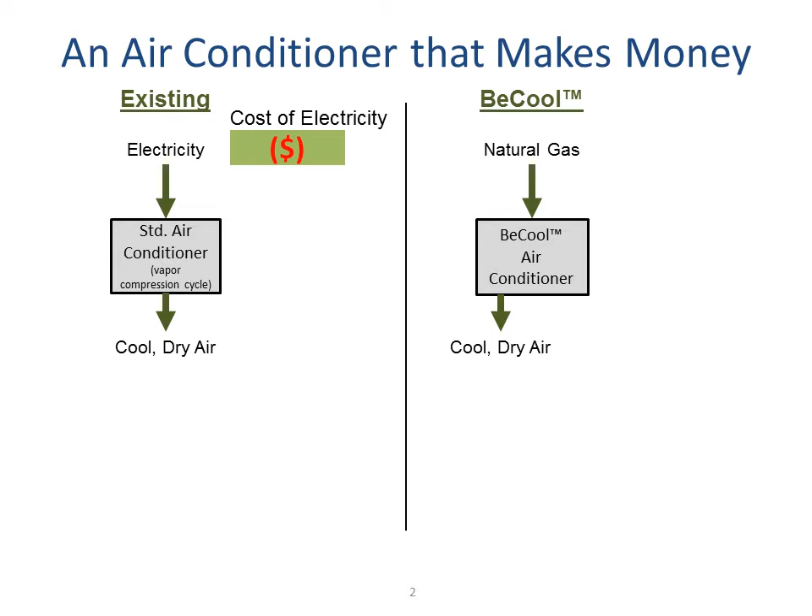Today, a standard air conditioner uses electricity to produce cool, dry air. The operating cost of the system is the cost of the electricity consumed. BePower is developing the BeCool air conditioner. This air conditioner uses natural gas instead of electricity. Like a standard air conditioner, it also produces cool, dry air. However, electricity is also produced as a byproduct of the air conditioning process.

In the BeCool air conditioner, the user pays for natural gas. However, the electricity produced can be used to power the rest of the building. This has an economic value because it reduces the cost of the electricity for the entire building. As you can see, the value of the electricity is in most cases higher than the cost of natural gas. The result is an air conditioner that makes money as it operates.

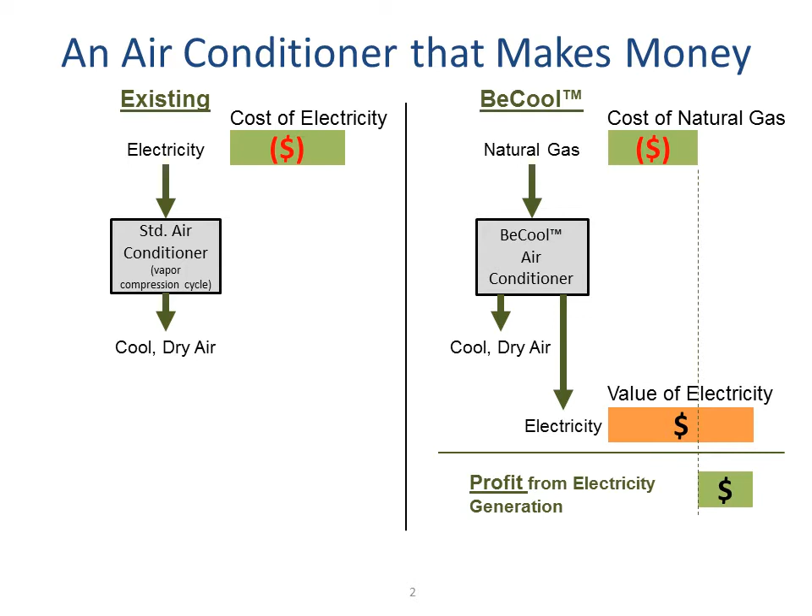The competitive advantage of the BeCool product is significant. To illustrate this, a comparison of costs associated with existing high-efficiency rooftop air conditioners, dedicated outside air systems or DOAS, and projected costs for a similar BeCool system are shown in the table. This analysis assumes all these units have similar specifications. They provide 2,500 CFM of air to the building and 10 tons of cooling.

The BeCool system also produces 15 kilowatts of electricity and consumes natural gas at a rate of 43 kilowatts thermal based on its lower heating value. The result shows significant life cycle cost savings ranging from 25% to 65% depending on how the system is used.

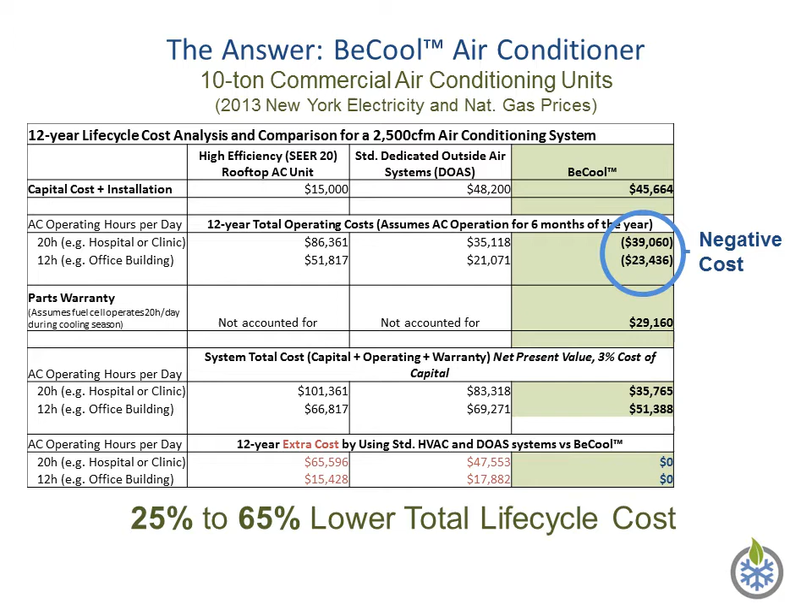Note that the operating cost of the system in New York is a negative number. This is not an error. As the system operates, it generates electricity at a lower cost than the electricity supplied by the grid. While the electricity price in New York is 15 cents per kilowatt hour, the BeCool system generates it at 8 cents per kilowatt hour, almost half the cost.

Increased energy efficiency, together with lower fuel costs due to the use of natural gas, enable the BeCool system to make money while operating. As shown in this slide, in energy terms, natural gas is significantly less expensive than electricity. Moreover, the tendency is for this disparity to increase in time.

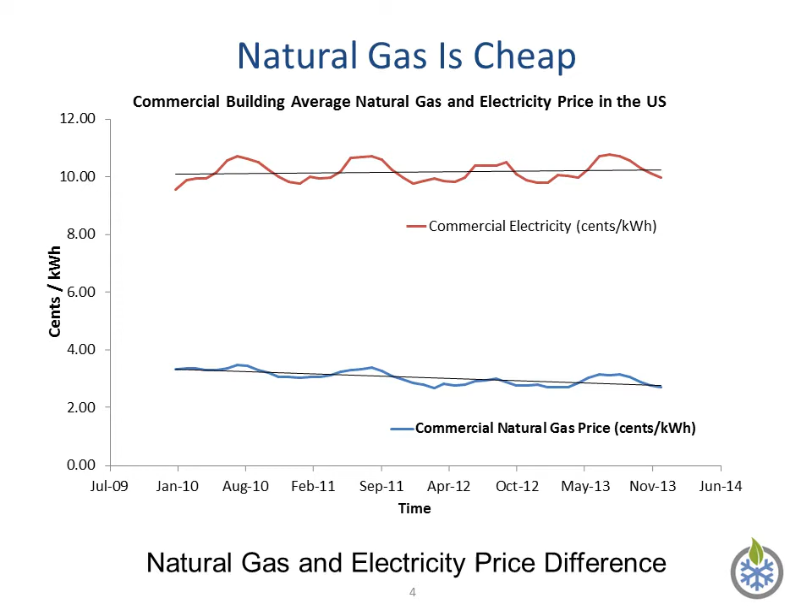The BeCool system is more than an air conditioner because it provides solutions to some of our most important global problems. Global climate change and a warming planet drive demand for air conditioning. It also drives demand for energy efficiency and for products that reduce greenhouse gas emissions, such as the BeCool air conditioner.

Regulations for reduced greenhouse gas emissions and air pollution controls tend to increase electricity prices. Increased prices drive demand for higher efficiency and for products that do not use electricity, such as the BeCool air conditioner. In places where electricity prices are capped or regulated, the reliability and quality of the electrical service often suffers. This drives people to seek alternative ways of ensuring operation of critical systems. In the commercial sector, air conditioning is a critical system. By using natural gas, the BeCool air conditioner is not dependent on grid stability.

Natural gas and LPG are an increasingly important alternative to petroleum and coal due to their lower greenhouse gas emissions. While demand for natural gas and LPG is increasing, their price in energy terms is expected to remain below that of electricity.

The World Health Organization considers air pollution the world's largest single environmental health risk. It is estimated that 7 million people die annually due to air pollution. The EPA estimates that this number is 200,000 people in the US alone. The two principal sources of air pollution are the transportation and electricity production industries.

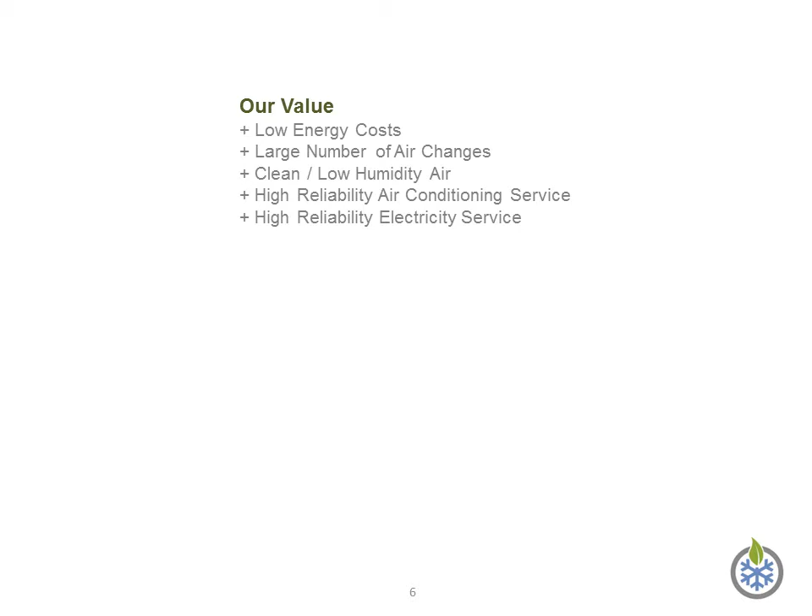Since the air conditioner is not dependent on the electric grid, it reduces the probability of a complete loss of air conditioning to the building. Since we produce electricity, we increase the reliability of the electric service. Who needs this? Data centers, hospitals, office buildings, shopping centers, to name a few.

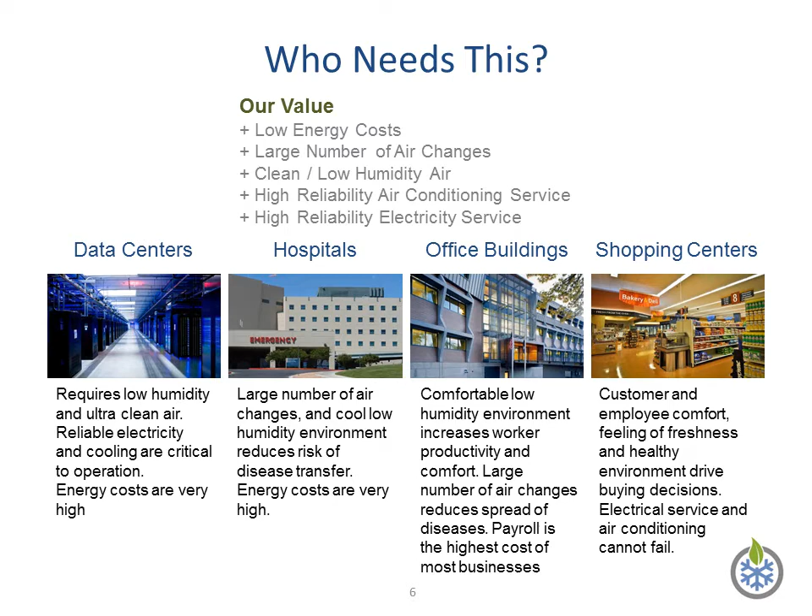The air conditioning market is mature, large, and growing. Revenues for the industry in the U.S. were estimated to be $74 billion in 2013 by IBISWorld. This represented a 4.1% year-on-year growth. Increasing electricity prices and increased use of central air conditioning systems is driving growth for high-efficiency air conditioners.

Navigant Research estimated that the present market is $17.2 billion with an expectation for high growth in the next 8 years. The market is projected to be $33.2 billion in 2020. The global market for air conditioning is expected to reach $107 billion by 2016. This represents a 6.1% year-on-year growth in revenues.

There is a strong appetite for products that save energy and reduce environmental impact. In fact, the market for energy-efficient products is booming. However, the most successful products are completely transparent to the user. They do not require changes in behavior or infrastructure.

The International Energy Agency estimated that in 2011, the energy efficiency market saved $420 billion worth of oil for its member countries. The International Energy Agency calls this the hidden fuel and mentions that the products that produce the highest degree of energy savings are hiding in plain sight. For the consumer, these products are effortless.

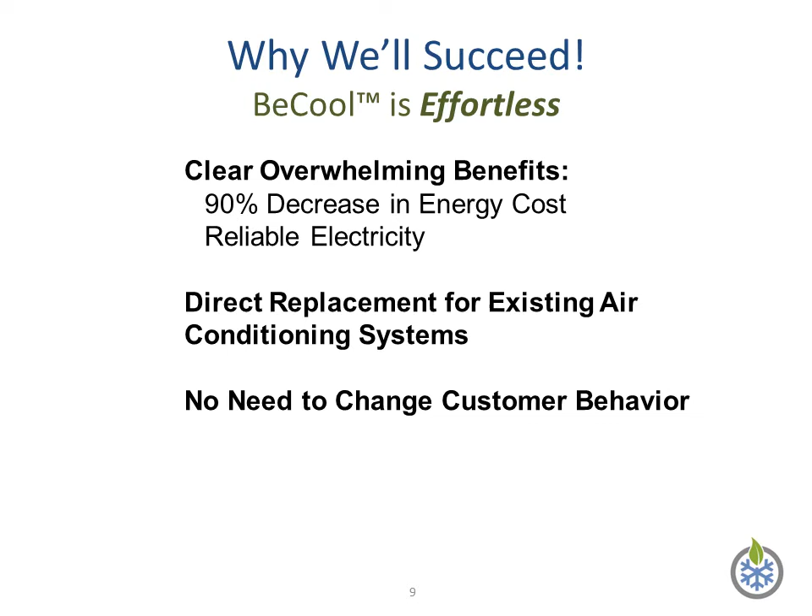The system works in the following manner. A liquid desiccant flows between two system components, a dehumidifier and a regenerator. A liquid desiccant is a fluid that readily absorbs water. Hot humid air that we want to cool enters the dehumidifier. Within the dehumidifier, the air comes in contact with the liquid desiccant. In doing so, the moisture in the air is absorbed by the desiccant.

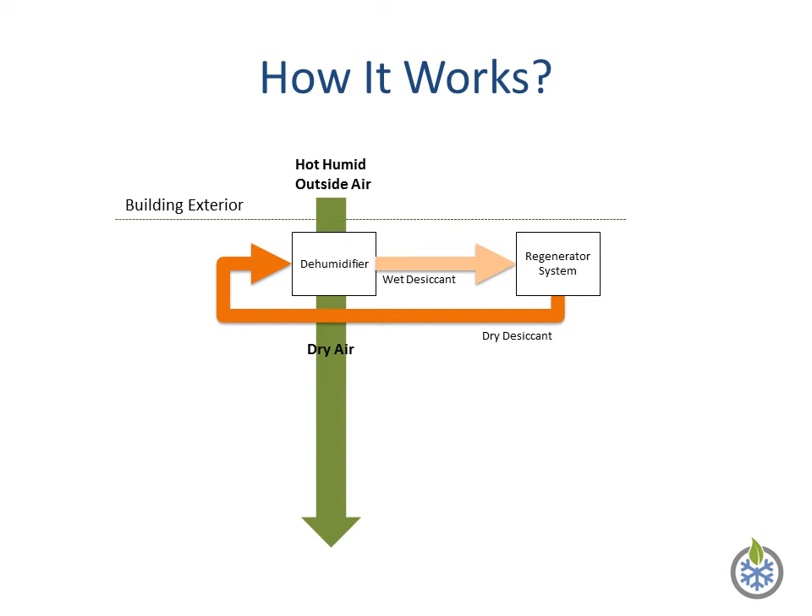This process tends to raise the temperature of the air, so the air is maintained at a constant temperature by flowing a separate airstream through the dehumidifier. This separate airstream cools down the dehumidification process. The source of this airstream could be building exhaust air.

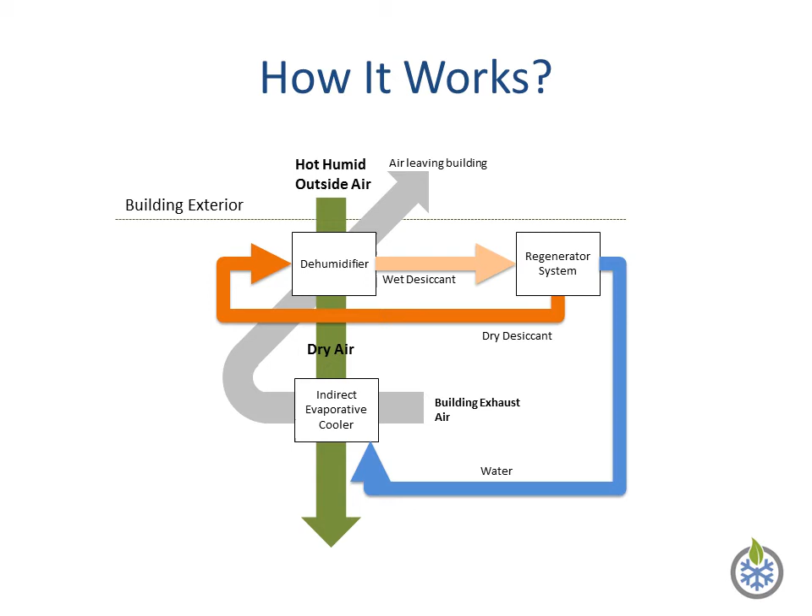The temperature of the air is dropped using an indirect evaporative cooler. In this component, water is introduced into the building exhaust airstream. This process drops the temperature of this airstream. We use this low temperature airstream to drop the temperature of the dry air produced in the dehumidifier. The result is cool, low humidity air that can enter a building.

The regenerator is an electrochemical device that consumes natural gas and produces heat, water, and electricity. The heat produced by the regenerator is used to recover the water in the liquid desiccant. This water, coupled with the water produced in the regenerator, is used to drive the indirect evaporative cooler. The electricity produced is a byproduct of the regeneration process.

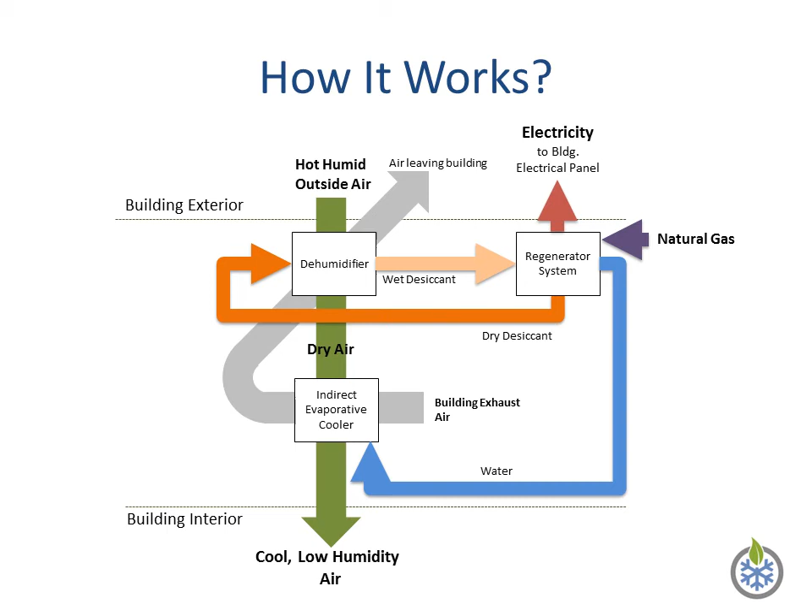The BeCool air conditioner system is in the development stage. We have conducted detailed engineering analysis and design, and patents have been filed. We are presently prototyping and testing key components of the system. We expect time to market will take 3 years. This will include prototyping, testing, design for manufacturing, pilot fabrication, field trial release, and product launch.

We deem the technology risk for the product to be low. The vast majority of the system components are off-the-shelf items and have been demonstrated to work under the conditions specified by the BeCool system.

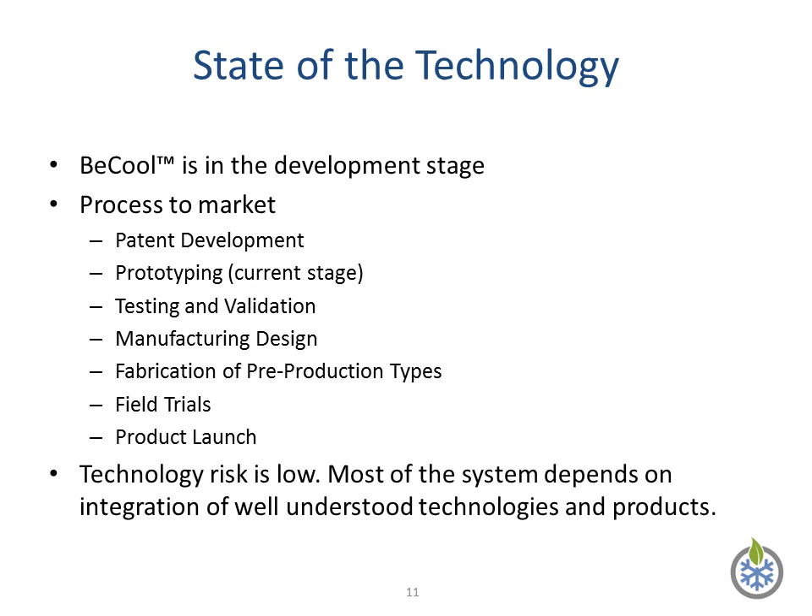Our business model is based on licensing, product support, and product development. BePowerTech will work with the manufacturer who pays a license fee to BePowerTech for the use of its patents and its product design. The company will also derive revenues from product development based on customer requirements. This manufacturer can be an air conditioning OEM or an outsourced manufacturer. The manufacturer will engage suppliers, will provide product warranty, and will supply products in a global market. The manufacturer will work with distributors who will engage customers directly.

The leadership of BePowerTech is formed by myself and John Kaufman. I have 18 years of experience in the energy efficiency, energy technology, and air conditioning business. This experience has spanned R&D, product development, and corporate management. I have a PhD in mechanical engineering with concentration in thermal sciences.

John Kaufman is my co-founder and friend. He brings to the company over 40 years of management experience in corporate management in the energy technology and software field. John was the co-founder of International Batteries and of Iconics. This corporate structure brings together experience and technical expertise and the capacity to reach the company's goals.

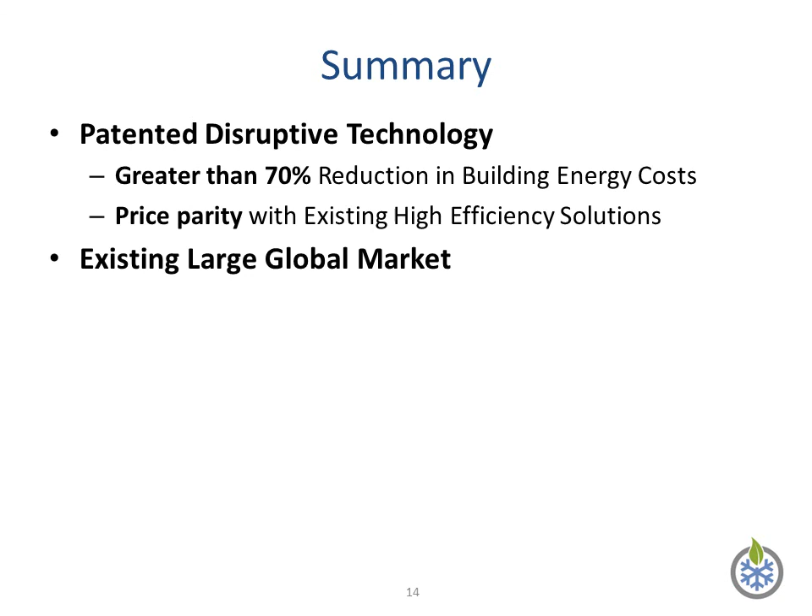In summary, our company is developing patented, disruptive air conditioning technology. This technology enables us to produce products that provide our customers with overwhelming benefits over existing solutions. The air conditioning market is an existing large market. We expect product release into this market in the next 3 years. Our management team has experience and technical expertise to achieve our corporate goals.

We aim to give people the capacity to control their environment without destroying it. In this way, people can be cool, be green, and be power.